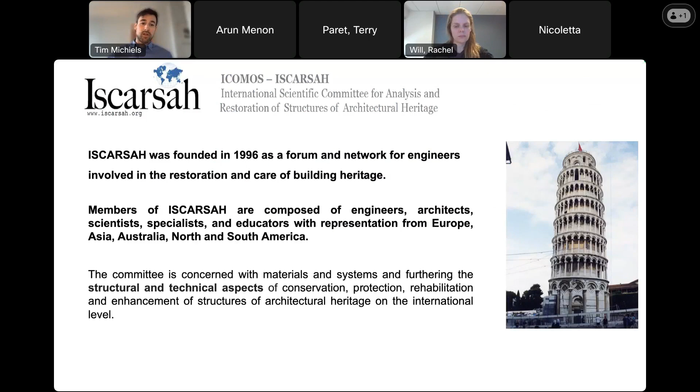ICOMOS ISCARSAH is the International Scientific Committee on the Analysis and Restoration of Structures of Architectural Heritage. It's a scientific committee of the International Council on Monuments and Sites, ICOMOS. Sometimes nicknamed within ICOMOS as the Structures Committee, we are truly an international group of engineers, architects, scientists, and educators dedicated to the restoration and care of built heritage. We do focus mostly on the structural and technical aspects of conservation of architectural heritage. We have a diverse board, with at the helm our president, Paulo Lourenço, and our secretary general is Tom Morrison, a past APT PETC chair. There's a lot of overlap here, as you can see.

The goals of ISCARSAH are, amongst others, to disseminate knowledge, promote international cooperation, and organize international training programs. Another goal is to collaborate with other scientific committees. And at ISCARSAH in 2003, we published the Principles for the Analysis, Conservation, and Structural Restoration of Architectural Heritage. This is about a 3-page long seminal document, which is available for free in 10 languages on our website. We highly recommend you check it out. If someone can post the link to it in the chat, that would be greatly appreciated. And much more in-depth guidelines for the analysis and restoration of heritage structures are also available on our website.

We publish newsletters and a bulletin. We organize several free webinars each year, all of which can be found on our website and YouTube channel. Also a small plug for our next webinar, which will deal with structures of heritage affected by war. That webinar is anticipated in late spring. We organize workshops. The last ones were in Iran, Korea, Japan, and Romania. And our next meeting will be in September at the Structural Analysis of Historical Constructions Conference in Lausanne.

The Madras terrace slab for floors and roofs is basically a thermally efficient traditional construction system prevalent in the erstwhile Madras Presidency in South India from the pre-British era, basically conceived with gravity as the primary structural loading in a region of low seismic activity.

The floor diaphragm is basically constituted of closely spaced wooden rafters spanning across walls. In turn, these rafters support burnt clay brick placed on edge and bonded with lime mortar. They are arranged in a diagonal fashion, starting from the corner, and finally topped by a layer of broken brick lime concrete and any architectural finish that is required eventually.

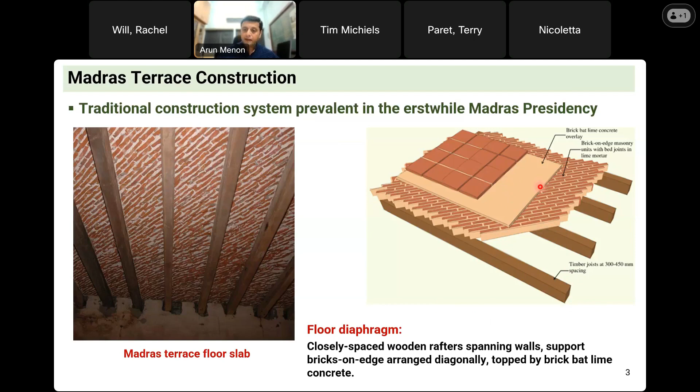A typical layout of the supporting timber joists spanning between walls and the closely spaced rafters placed orthogonally can be seen in this figure on the left. The sockets in the wall where the rafters are embedded and the diagonal brick on edge pattern of the masonry overlay are also shown.

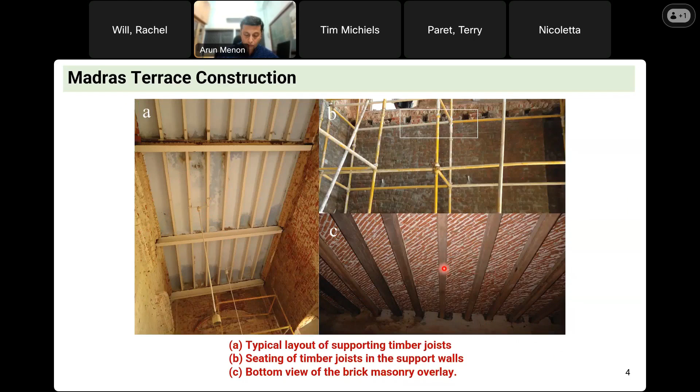A construction system that finds its roots in the pre-colonial era in the region went through a series of formal engineering iterations and finally found its way into the Bureau of Indian Standards, a code of practice, in the 1980s. This is a robust construction system where repairs or replacements of the timber rafters can actually be carried out from the soffit without disturbing either the brickwork or the lime concrete.

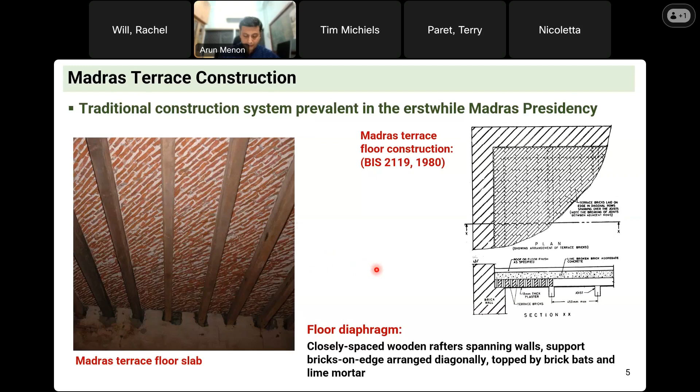Unfortunately, standard rehabilitation practice has been to completely dismantle the slab and replace it with a reinforced concrete slab, especially in recent years, citing potentially poor performance under seismic action, with the revisions of the earthquake safety standards and requirements for existing masonry buildings. In this context, with an aim to holistically achieve the preservation of this traditional construction system while addressing structural safety concerns, our study itself was designed.

The SDGs 2030, particularly SDG 9, address the need to upgrade and retrofit existing infrastructure, making them resilient to natural disasters, while also ensuring that emissions from the construction industry are minimized as much as possible. Culture serves to achieve such SDGs through an exercise of preserving traditional knowledge systems, which is an intangible cultural heritage, and finding relevance in a safer and environmentally conscious solution.

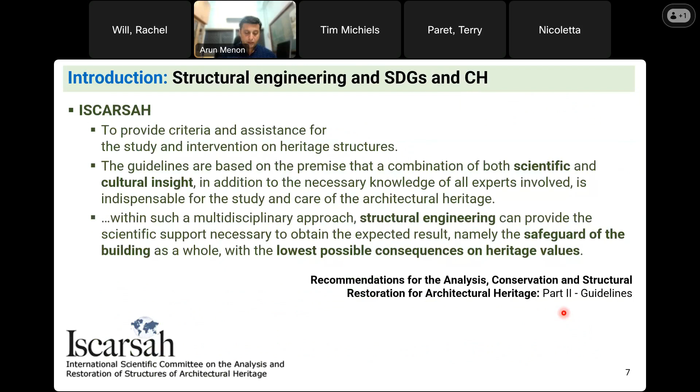As expounded by the ISCARSAH Principles, a multidisciplinary approach is required, with structural engineering becoming the enabler, providing the scientific support necessary to obtain the expected result, namely the safeguard of the building as a whole with the lowest possible consequences on heritage values. Again, guided by ISCARSAH Principles, an attempt must be made to improve and complement structural behavior of historical components of systems as against wholesale replacement with modern systems, while recognizing the limitations of modern codes and conventional approaches.

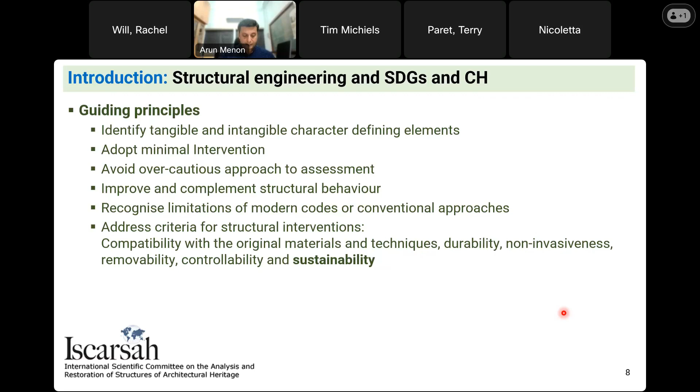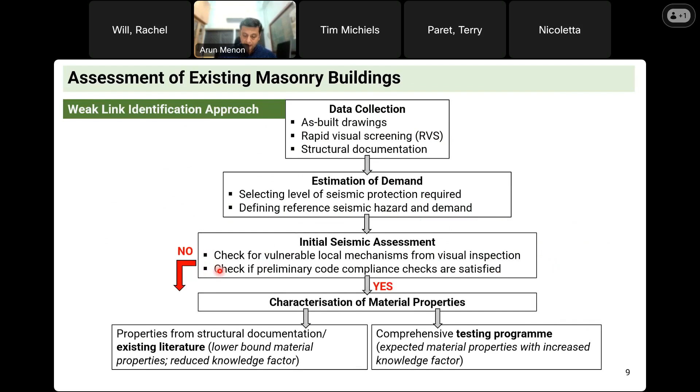All such interventions in historical buildings must essentially address compatibility with the original construction, materials and techniques, durability, non-invasiveness, removability, controllability, and sustainability. This brings us to the role of such floor diaphragms in the seismic performance and assessment of existing masonry constructions. The assessment and retrofit must attempt to identify potential weak links in the seismic load and resistance path. To ensure satisfactory box action in masonry buildings, possible local out-of-plane mechanisms must be identified and prevented through level 1 interventions that address wall-to-wall connections, wall-to-diaphragm connections, and so on.

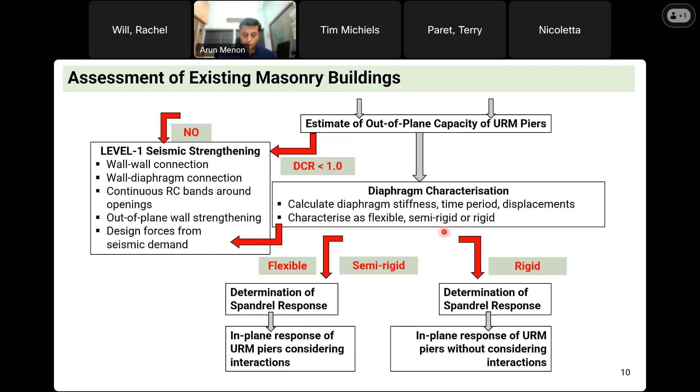The critical role of the floor and roof slabs in the seismic resisting path cannot be overstated, and its in-plane stiffness classification and response is crucial in preventing local mechanisms before any in-plane strengthening of walls is adopted as level 2 global lateral capacity improvement. This is a typical approach that's adopted for masonry constructions.

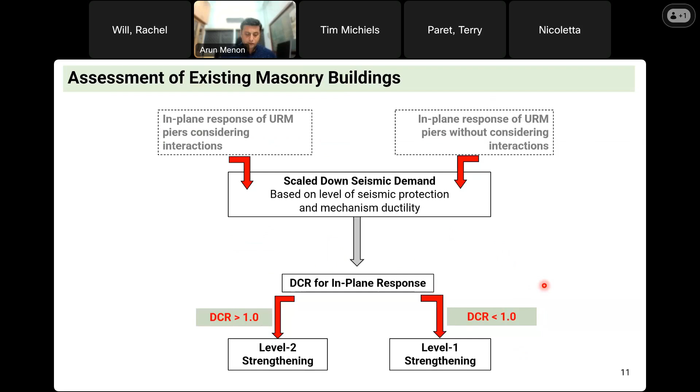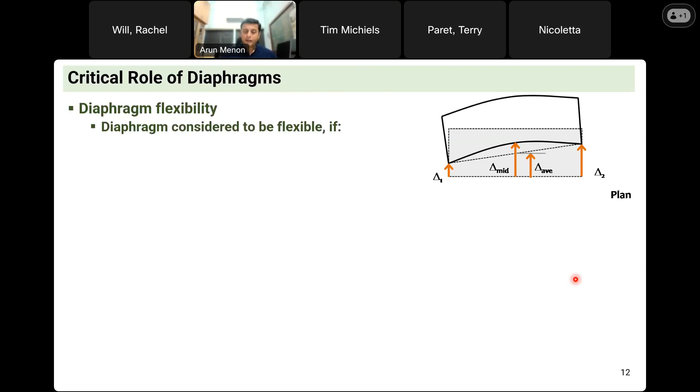Now, particularly with respect to the role of the diaphragm, while characterizing a diaphragm's in-plane behavior, it is clear that the degree of in-plane stiffness of the diaphragm will determine how lateral forces will be distributed to the load-bearing walls. If it's a rigid diaphragm, you have the distribution based on the relative stiffnesses, whereas if it is a flexible diaphragm, the distribution depends on the tributary areas.

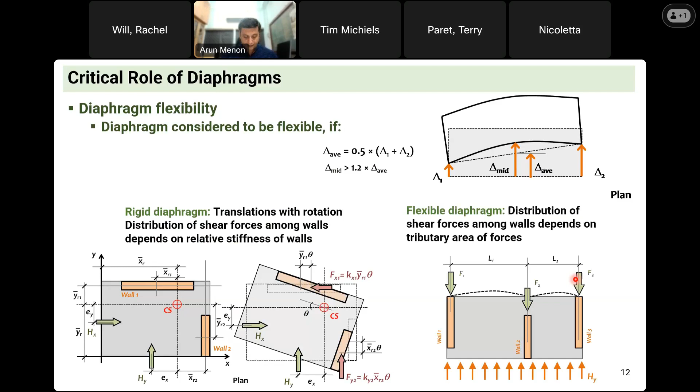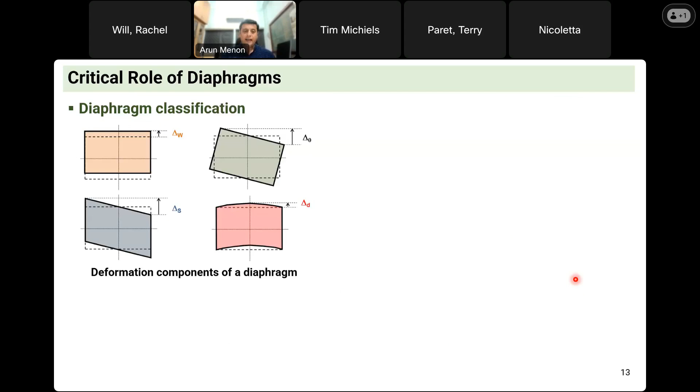The total in-plane diaphragm displacements are composed of rigid translations and rotations and flexural and shear deformations. At the two ends of the spectrum of in-plane diaphragm period of vibration versus diaphragm displacement, a rigid, well-connected diaphragm and a flexible, well-connected diaphragm would have the least vulnerability in terms of increasing diaphragm deformations being transferred to the supporting walls. But the case is quite different with stiff and semi-flexible diaphragms, with the maximum demand of diaphragm displacements coming onto the supporting walls. So it's in this context that the study has been undertaken.

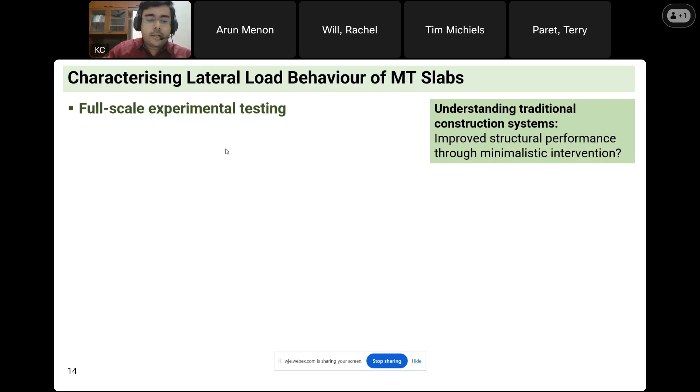It is well accepted that the lateral response of Madras Terrace slab has limitations. However, this needs to be quantified adequately, for which the lateral response of Madras Terrace slab was studied using a full-scale experimental test in the original configuration. The test specimen was prepared at the Structural Engineering Laboratory of IIT Madras. The following images show the steps involved in the same, starting from placement of the timber joists, followed by the laying of the brick masonry overlay, and finally, the placement of the lime concrete overlay.

Further, a loading tree setup was created so as to distribute the actuator loads to each timber joist, thereby closely simulating the deformed profile of the slab under inertial loads. Displacement control loading was applied through the actuator, and LVDTs were placed at relevant points, both in the overlay as well as the timber joist, to monitor the displacements.

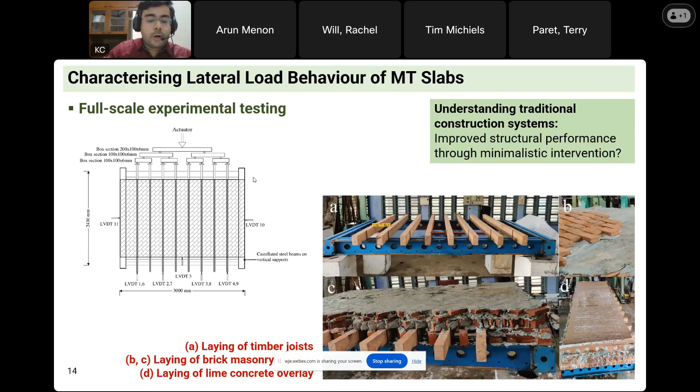After the loads were applied, the deformed profile of the diaphragm showed significant sliding in the timber joist due to a lack of integral action between the joist and the overlay. Sliding of the joist commenced at a load of approximately 17 kN, and therefore it was inferred that a lack of integral action between the timber joist and the overlay is the principal weakness associated with the system under lateral loads.

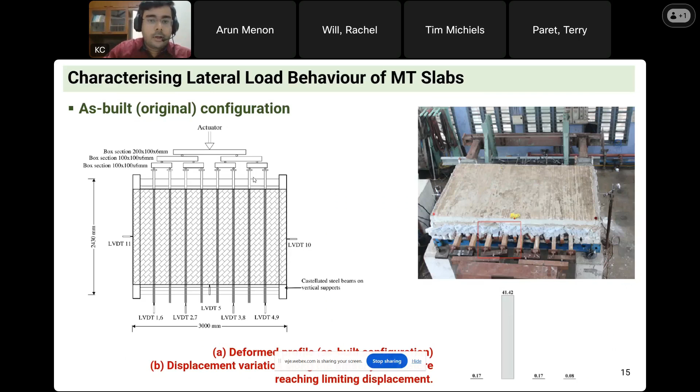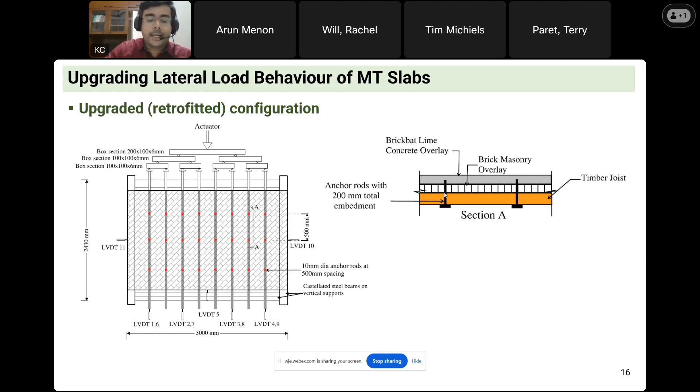As the next step, a retrofit intervention was introduced to improve the system in terms of bringing in integral action between the joist and the overlay. The intervention was minimalist in nature, without affecting the appearance and the positive attributes of the original system, but upgrading it for improved seismic performance. The upgrade involved post-installed anchor rods drilled from the underside of the joist, acting as a shear connector that integrates the joist and the overlay. The same loading protocol, which was used for the test in the original configuration, was used here as well.

Results showed that there was no sliding at all in the timber joist, as shown in the image here, and a uniform deformation response of the slab was achieved in the image below. Further, as shown in the image, it was observed that the failure was no more defined by the sliding of the joist, and it was defined by the flexural cracking of the overlay.

Comparison of the force deformation responses in the as-built and the upgraded configurations showed that there has been a significant strength capacity enhancement, close to 4 times for the upgraded configuration. This was a major improvement in the capacity of the system, as it changes the hierarchy of weak links in the system by extracting the full capacity of the slab, making it less vulnerable and delaying its failure compared to other members of the lateral load resisting system.

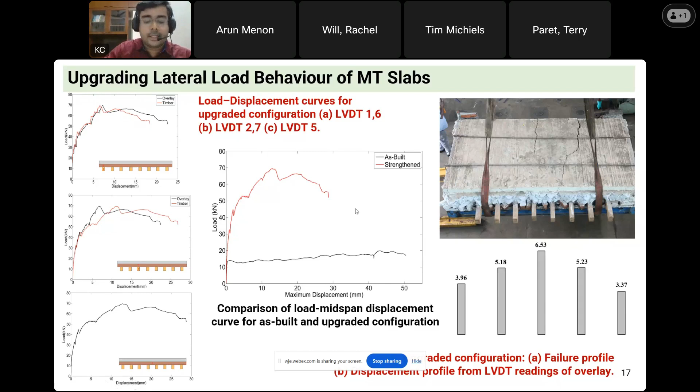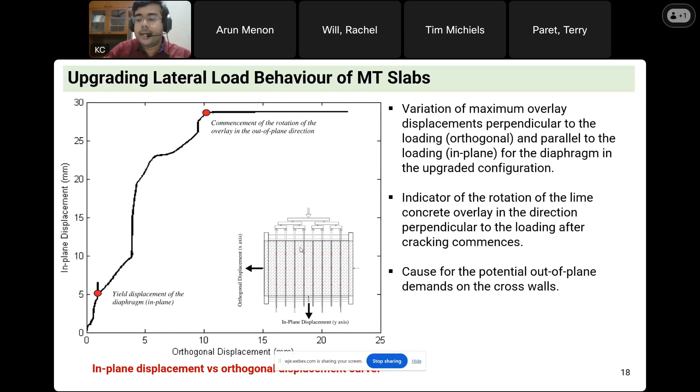While upgrading such traditional systems, it's also important to check if the upgrade brings new effects to the overall system response, and we need to address the same. One such effect that was observed was the rotation of the overlay as a macro block post-cracking. This results in displacements perpendicular to the loading direction and also could cause out-of-plane demands on the cross walls supporting the slab. This aspect needs to be addressed in the out-of-plane assessment of these cross walls, considering combined in-plane and out-of-plane effects for the same, which was undertaken as part of another study. This is very important since this upgrade of one weak link, that is the diaphragm, should not result in effects that create new weak links, even though these may be less critical in terms of their weaknesses.

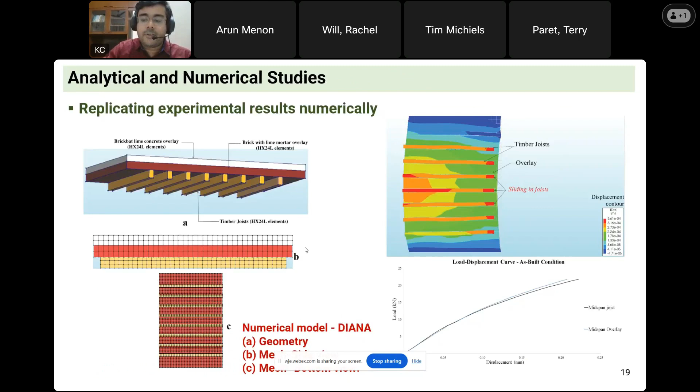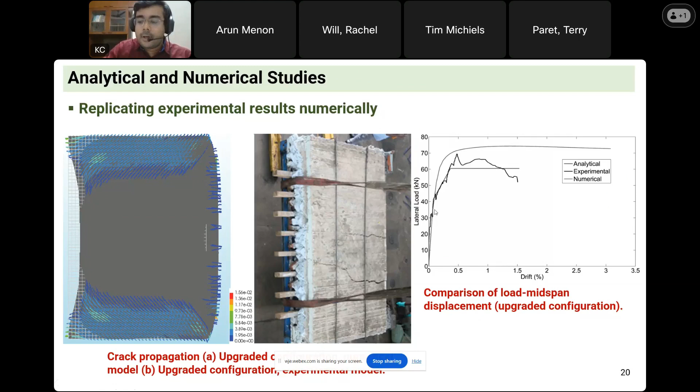Our experimental results were further verified and validated with numerical studies that successfully replicated the failure profiles and capacity curves from experimental tests. Based on the same, a simplified analytical model was defined for the upgraded Madras Terrace slab, which is useful for practicing engineers as well. The model is defined by a stage 1, which utilizes the integral action of the overlay and the joists for defining the elastic stiffness and the cracking load of the system. Stage 2 is defined by the post-cracking response of the overlay, and stage 3 is defined by the attainment of peak drift of the system.

Now, the conceptual understanding of the response of the Madras Terrace slab was not limited only to the upgrade of existing slabs. As the next step, the understanding was extended to introduce a re-engineered form of the traditional slabs that fits into the modern design fundamentals. This included setting up of design guidelines for the gravity design of the slab, considering partial to full composite action between the overlay and the joists through shear connectors.

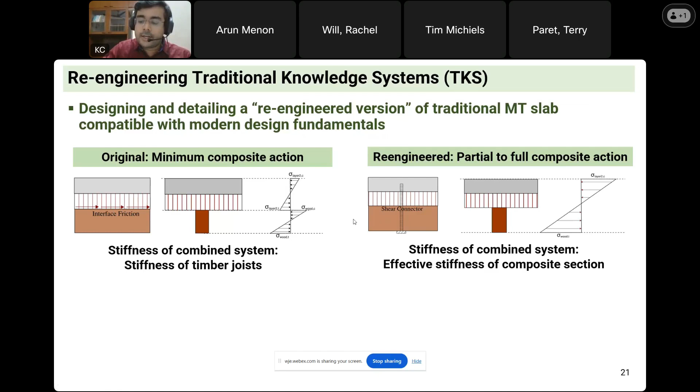It is useful to point out here that the traditional system was relying only on the interface friction for shear transfer. The design process involves arriving at the optimum size and spacing of shear connectors to ensure integral action between the overlay and the joists, both from gravity as well as lateral load considerations. The design also considers effective stiffness of the composite action for long-term deflection considerations, which now resolves the long-term deflection issues and the sagging of the timber joists due to non-composite action.

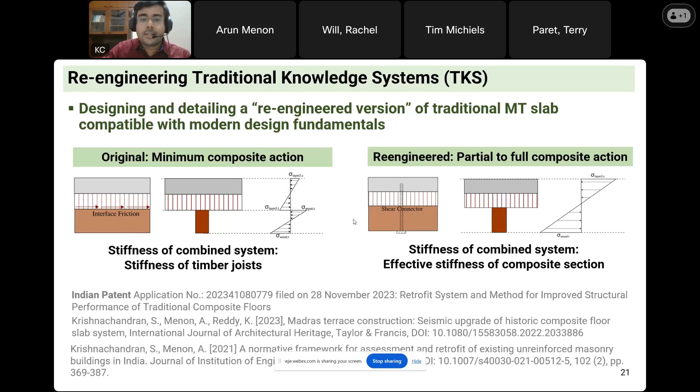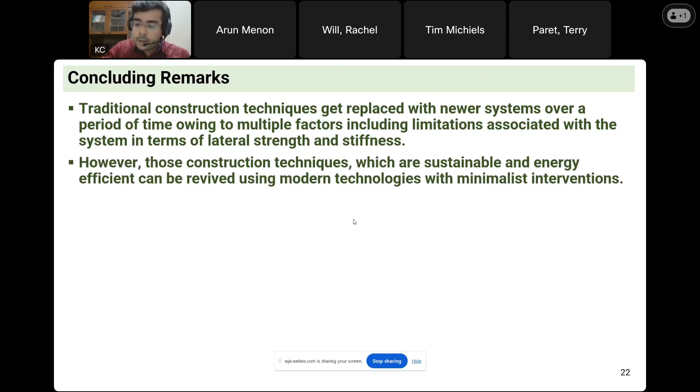In addition, the presence of tensile elements in the form of timber joists can be utilized as collector elements for the drag force transfer and also as chords in the slab. Summarizing, many of the time-tested structural systems with significant positive attributes get replaced with newer structural systems over time. When the bounds of our knowledge and the technical advancements in the subject domain get broadened, it is expected that the inefficiencies and weaknesses associated with these traditional systems get identified. However, in the process of trying to resolve these weaknesses, we tend to overlook their positive attributes and replace the structural system with newer ones.

However, there could be an option to improve the structural system, re-engineer it, or in other words, improve the structural system. In this study, we attempted to upgrade the Madras Terrace slab for the identified deficiencies using modern technologies with minimalist interventions, bringing in composite action to the system and retaining the original materials and appearance. Experimental testing was carried out in the existing configuration and the upgraded configuration, and results indicate significant improvement in the ultimate load capacity and the post-yield response due to the upgrade. Finally, the understanding was also extended to introduce a re-engineered form of the slab that fits into the modern design fundamentals.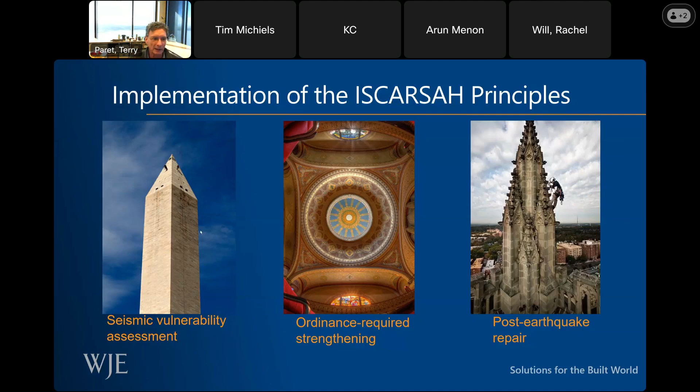I'd like to start with a few random thoughts about the ISCARSAH Principles themselves. Many of you are going to be familiar with the ISCARSAH Principles. Some of you perhaps not so much, but the principles are fundamentally high-level guidance. They are philosophical, not procedural. In my view, that's probably a plus, right? Because one of the problems we have in our discipline is the use of methodologies on highly nuanced heritage structures, right? Formalized methodologies don't blend well with highly nuanced heritage structures.

On the other hand, the lack of procedural guidance has its downsides in that it leaves some folks in the profession very unmoored and unsure of what to do, and sometimes reaching for the wrong procedures that are incompatible with heritage structures. In general, the principles are obviously very conservation minded, and with respect to seismic aspects, they're unlike any document in the United States, perhaps with the closest being Preservation Brief 41.

For those folks who practice in the US who are interested, Preservation Brief 41, while perhaps not perfect, is a really good start to bringing conservation mindedness into the seismic world. My view is that the principles ought to be self-evident to the segment of the engineering community that practices in the conservation seismic field, but it's clear that they're not, and you only have to look at the widespread use of ASCE 41 in the US, which really has not one whit of conservation mindedness in it.

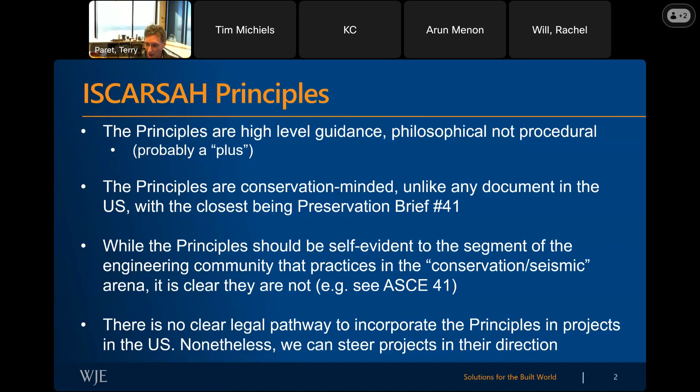Incorporating them explicitly. So the first project I'm going to talk about was really initiated by the Mineral earthquake in 2011, which some of you at least know caused damage to a number of monumental structures in Washington, D.C. The day after the earthquake, we were brought in to perform a damage assessment on what we believe to be the tallest unreinforced masonry structure in the world, otherwise known as the Washington Monument, which it turns out was damaged enough that it had to be closed for assessment and repair for 2.5 years following that earthquake.

So while there wasn't a lot of damage to kind of more normal community-wide buildings, there was substantial damage to monumental type structures. That work ultimately led to us being asked to perform a seismic vulnerability assessment of the structure, and that's really what I'm going to be highlighting here, what I'm going to be talking about.

A few of the principles highlighted by this are: do your research, respect heritage value, and credit inherent strengths. Don't be reflexive, think through the problem, because heritage structures are nuanced. And finally, respect the project criteria. I think that's a particularly key one here that I want to expand on.

Essentially, we were asked, and this is important to understand what I'm going to be telling you, we were asked to determine if this historic, tallest unreinforced masonry building in the world really provided a level of seismic safety that was roughly equivalent to that of a new structure. Keep your eye on that ball, because that was the project goal, or that was our charge, and we didn't expand that charge. We kept to that charge, and keeping to one's charge on these projects is super important.

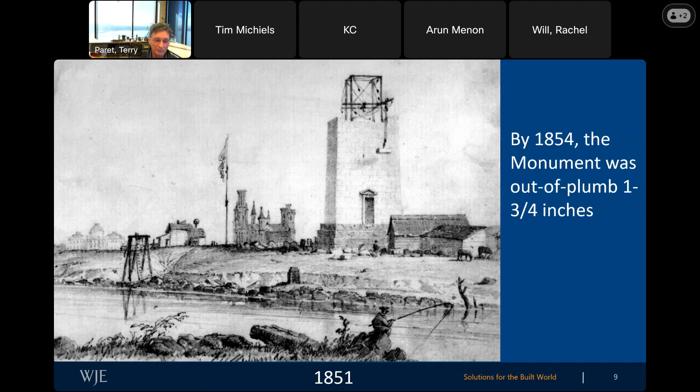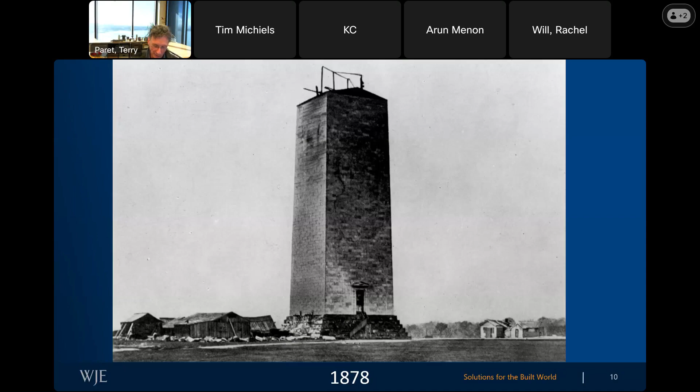Construction of the monument recommenced in around 1878, more than a decade after the Civil War had ended, at which time the project was taken over by the U.S. Army Corps of Engineers, and a very brilliant engineer by the name of Lieutenant Colonel Thomas Casey. The first thing Lieutenant Colonel Thomas Casey did was to recognize that the foundation was very, very inadequate for a structure that was ultimately to rise to 555 feet tall. So he redesigned the structure and he redesigned the foundation.

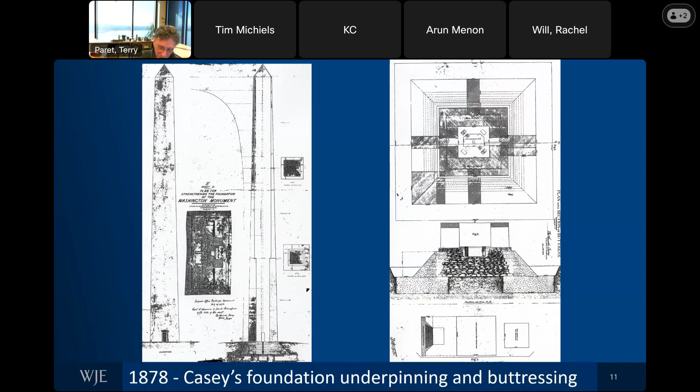We know an awful lot about the monument's construction, which I'm not going to take a lot of time to describe, other than to say that the top of the monument, the pyramidion, its structure is very different from the construction of the balance of the monument, the shaft. It's all unreinforced masonry, but the top is a very oddball structure.

Most of the structurally significant damage from the Mineral earthquake was concentrated in the pyramidion up at the top. So keep your eye on that ball as well.

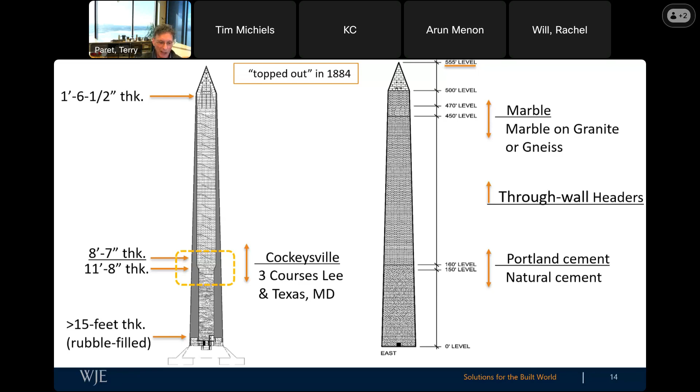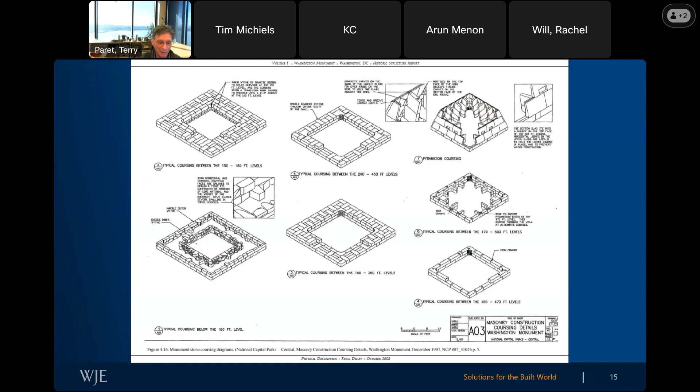I found the coursing diagrams for the monument, which we found in the HSR, to be fascinating and very informative about how the monument was constructed and how the materials were laid out within it. On the basis of everything we knew, we prepared very detailed models in SketchUp so we could really understand the geometry of the system and identify the various parts.

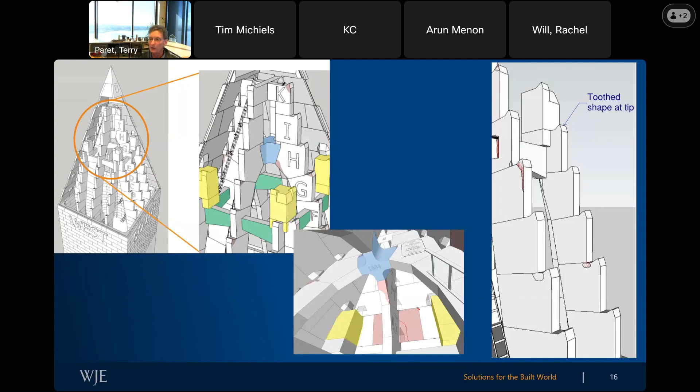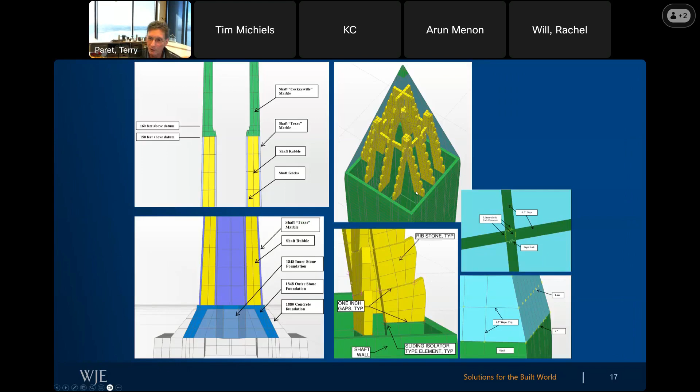On the basis of all of that as well, we developed nonlinear analysis models in SAP 2000, which I don't need to go into detail about, to give you the crux of what this project was really about.

Simultaneous with all that work, we were working closely with our partners in the geotechnical realm to study the seismological aspects of the earthquake and of the site. Don't take your eye off that ball, the seismological aspects.

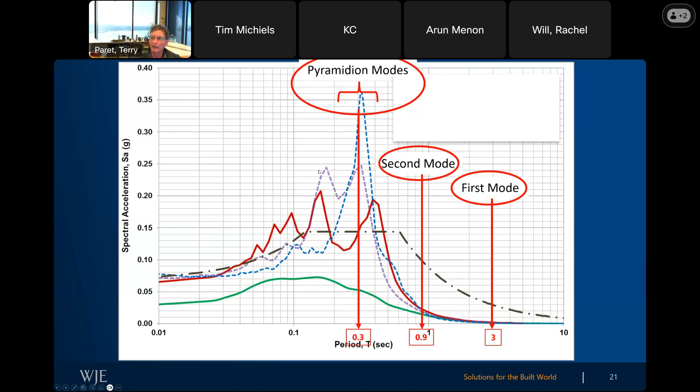Hold that thought. If you look at the legend, there's still more on this slide than you need to focus on. First, the dashed black line is the maximum considered, risk-adjusted maximum considered earthquake for the USGS. This is the 2475-year return period earthquake - the basic earthquake we designed based on, and in the US we design based on two-thirds of that number. So that's the MCE, the risk-adjusted MCE.

The next thing you should look at is either the dashed blue line or the dashed purple line - these are representations of the site response of the Washington Monument, which sits on the National Mall. Those two lines were calculated in different ways.

The key point to see here is that those lines substantially exceeded the MCE in the short period range and were substantially less than the MCE in the first mode. The reason the MCE is so much larger than the other lines in the first mode is really a consequence of what's believed to be the motions at the site from that 1886 Charleston earthquake.

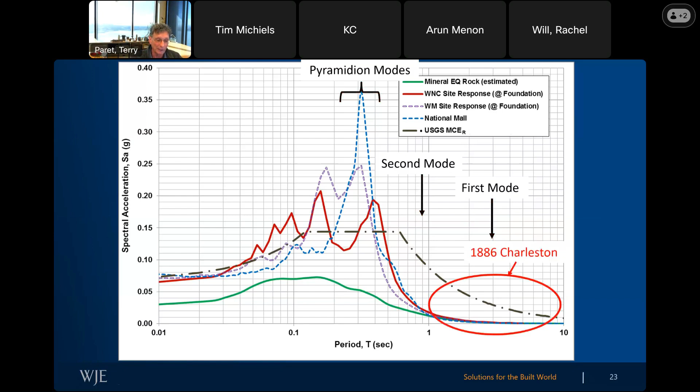Here's the last slide I'm going to give you before the conclusions. We are that close, I just haven't told you the punchline yet. This is another representation of the motions in ADRS format, in which the thick turquoise-like color line is the best estimate of the site response spectrum from the 2011 Mineral earthquake, and the thick dark blue line is the best estimate of the response spectrum for the MCE motions, which include the 1886 Charleston earthquake.

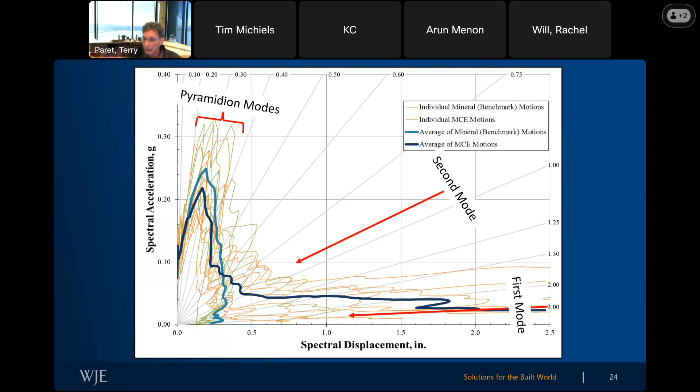I think this slide tells the story most clearly. During Mineral, the pyramidion modes were excited to a greater extent than they would have been even by the MCE. But the shaft was barely excited at all relative to the MCE. However, the shaft mode is right there at the peak of the Charleston response spectrum.

So the conclusions are these: the seismic vulnerability criteria for the monument were really satisfied. This structure can be argued to be as safe as a new structure. Why? Because the pyramidion experienced its MCE in 2011, and the shaft experienced its MCE in 1886. Done, right? You can kind of wash your hands of it.

I will tell you in closing on this particular aspect that we did recommend that certain additions be made to the pyramidion just solely to account for potential directionality differences between some future MCE and the MCE we just experienced. So that's it for that subject.

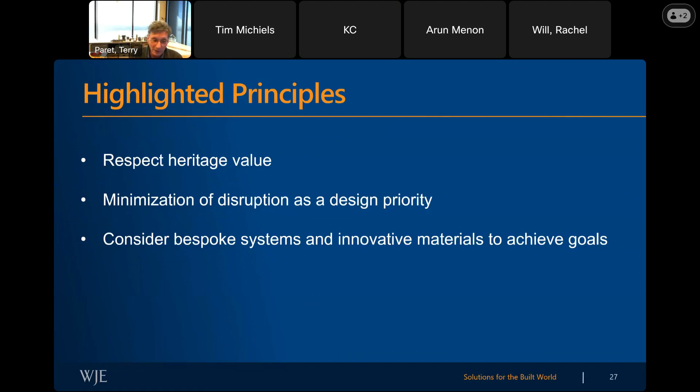This is the ordinance-required strengthening of Sherith Israel, which is a synagogue in San Francisco. The highlighted principles for this particular project are: respect heritage value, minimize disruption as a design priority, and consider bespoke systems and innovative materials to achieve your goals.

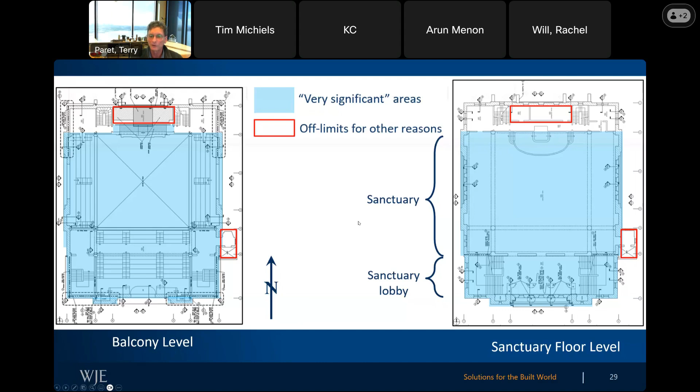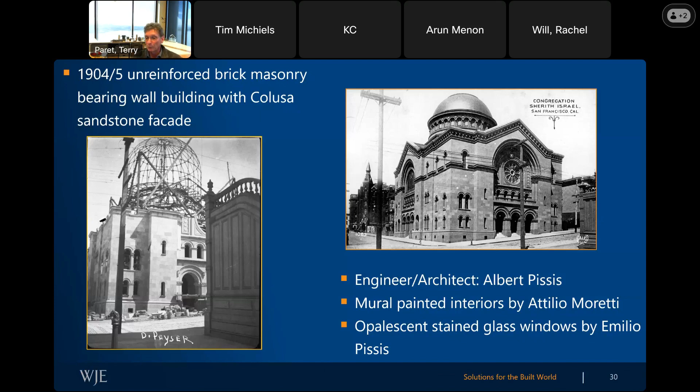But first, I want to give you a little bit of context about the structure so you understand how we got to where we are. First of all, this is a roughly 1904 unreinforced brick masonry bearing wall building with some steel framing—some very light, flimsy steel framing in the interior space with a Colusa sandstone facade. The engineer and architect was the very brilliant Albert Pissis, who designed a number of major buildings in San Francisco that survived the great earthquake in 1906. The guy just had a proven trial-by-fire record. Unbelievable. And all without a computer.

So you understand a little bit more about the structure, I want you to see this.

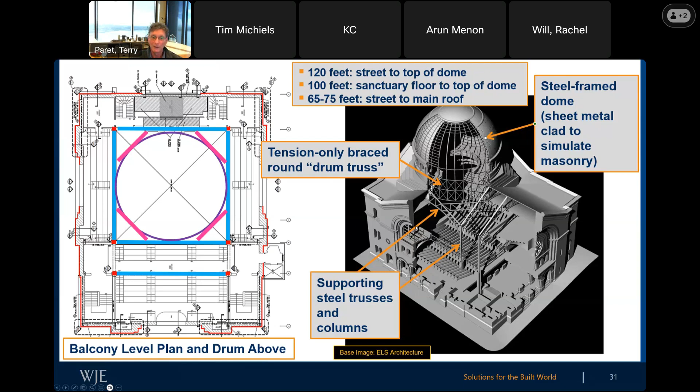Notably, it also has very flexible wood diaphragms, and they're flexible not just because they're wood, but because of the sanctuary space at the balcony level and through the dome, there are these very large openings in the diaphragm. So we have very flexible floor systems supporting the walls out of plane, which drives a fair amount of the response.

These walls functionally, with flexible diaphragms to support them out of plane, bow outward. During seismic events, they bow significantly, and because they are articulated in plan, they try and unfold, right? They try and catenary to a degree. We demonstrated that is actually true, that the damage we see in the attic space today from the unfolding of this wall and the out-of-plane bowing behavior of all four walls is real. It's predictable analytically.

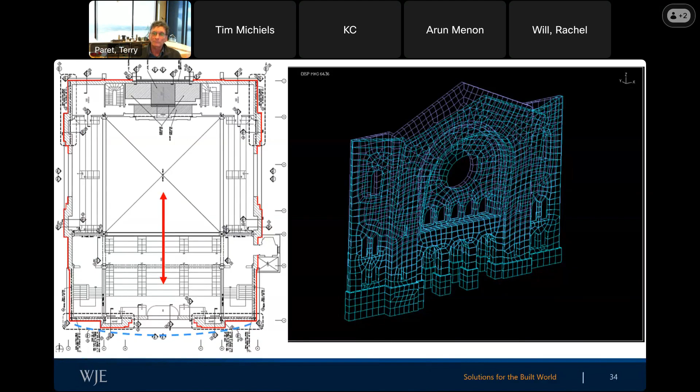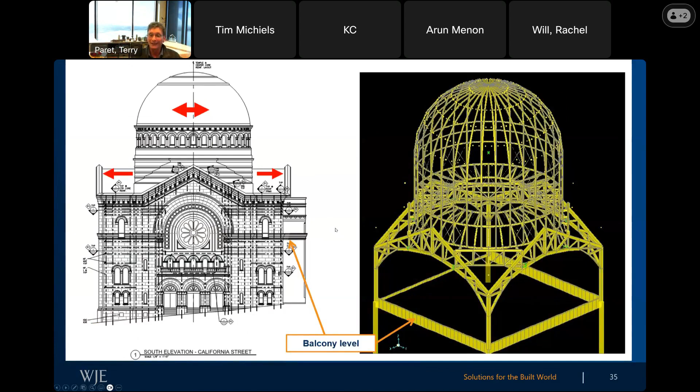And we think a lot of this behavior is also driven, interestingly, by the excitation of the drum and dome. When it tries to sway back and forth, it pounds on the gable roof sections, and those pound against the gable end walls and help to push those things out of plane, which is not a great behavior mode. Lots of other behavior modes in this thing that I could talk about, but because I'm only talking about one intervention, I'm only talking about that behavior mode.

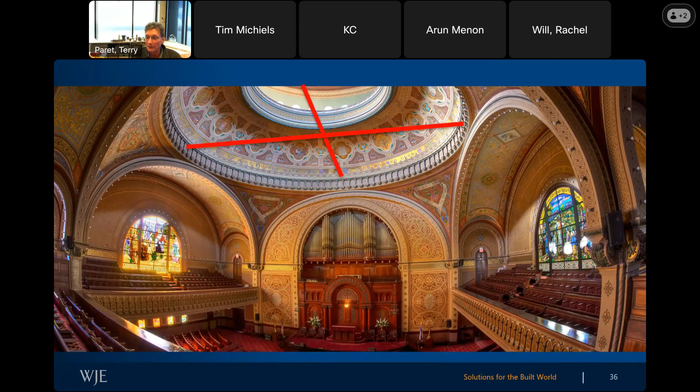Now, it's pretty intuitively obvious that one way to help control that behavior mode is to put in tension ties. But we took one look at the thing and said, well, that would be pretty ugly, pretty disruptive. So we tried to really improve on this traditional system, the way it's been used around the world. We wanted to avoid disruption to the sanctuary, and we wanted to neutralize some of the disadvantages of using steel or iron, because those things undergo plastic deformation.

You have a choice, right? You can either make them very strong and stiff, in which case the odds are they're going to pull out of the walls where they're connected. Those connections will fail. Or you can make them less stiff and less strong and let them yield. But then after a single cycle of response, your walls are out of plane, and there's no ability to bring them back into their original position.

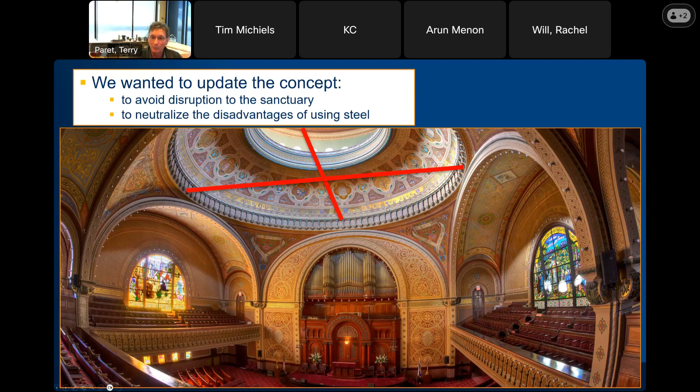So we got creative, and we put in a tension tie system that was above the ceiling of the sanctuary and circumvented that open area, the interior drum. That system consisted of an octagonal tension ring with some outriggers composed of steel and nitinol harps, which I'll describe in one moment, but 4 nitinol harps, one in each quadrant of the structure, one to support each of the exterior masonry walls.

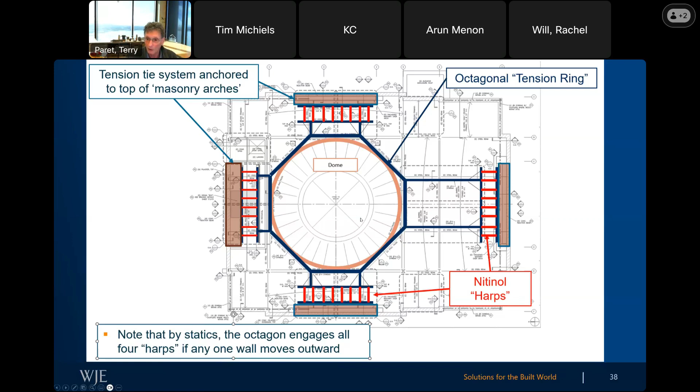And note that by statics, when you look at this, if one wall tries to move outward and fall out of plane into the street, the nitinol actually gets engaged. All 4 of these harps get engaged with the movement of only one wall. So structurally, it's really very efficient.

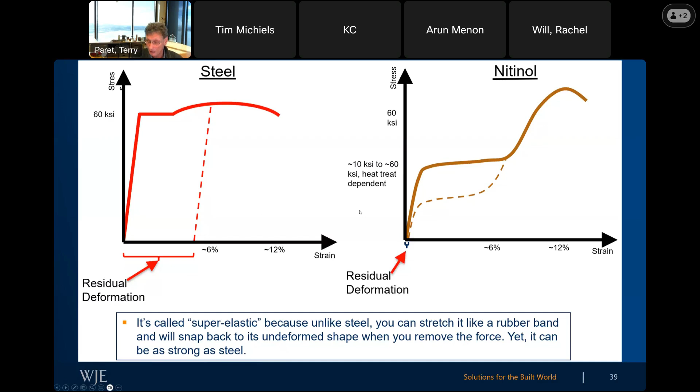Nitinol, for those of you who don't know, is a super elastic material. It's magic metal. This stuff is the coolest stuff you could ever work with. If you stretch steel out to 6%, you have mostly non-recoverable residual deformation. But if you stretch nitinol out to 6% and let go, it'll bounce right back to the way it started. So this material, relative to the masonry and to this building, has wonderful capability to do a lot of things, which I'll describe in one second.

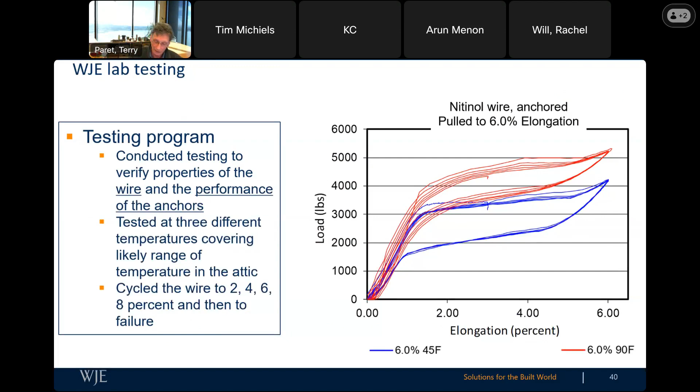While the properties of nitinol are fairly well established, we went through a fairly elaborate testing program in-house to validate that this would work for us. And these are the load displacement curves really for the nitinol in our lab. And you can see we're stretching it out to 6%. And when we let it go, it goes back to 0. I mean, it's magical stuff.

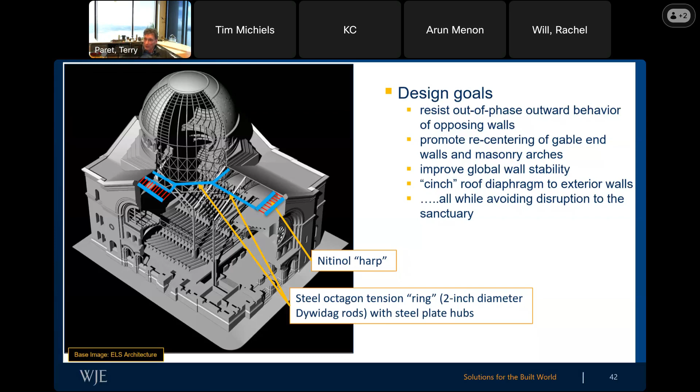What this ultimately does, it not only resists the out-of-phase outward behavior of opposing walls, but it promotes recentering, right? Which is kind of like a goal of seismic response that we'd like to install in many structures to get them to recenter. But it improves the global wall stability, and essentially it helps to cinch up the whole roof diaphragm, where we have this giant opening in the middle, all while avoiding disruption to the sanctuary.

Now, I've got 5 minutes left, right, guys? So maybe I'll hit this for a couple of minutes. Yeah, you got time, Terry. All right. So I exceeded my own best expectations.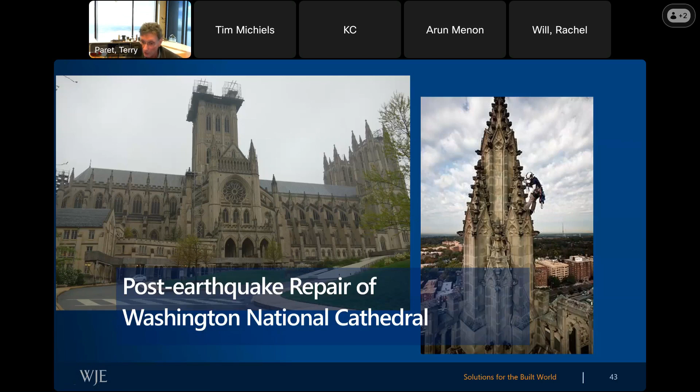So the post-earthquake repair project is of the Washington National Cathedral. This too was damaged by the same event that the Washington Monument was damaged by. It's worth noting that this building has an extraordinary number of pinnacles on it. This is all unreinforced masonry as well. Extraordinary number of pinnacles everywhere you look, which I'll talk about in a few seconds.

The highlighted principles for this, again, are respect heritage value. Again, respect the project criteria, which here were, we don't want to do a seismic upgrade of the building. We want you to fix the damage and not do much more than that, and also minimize interventions.

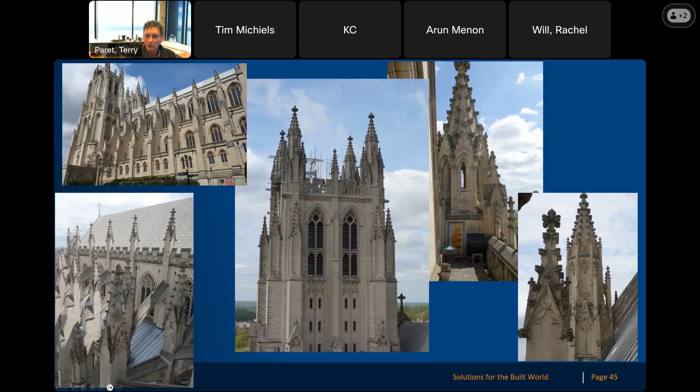So I mentioned before, this building has a lot of pinnacles. It has a lot of turrets and other features. In some cases, it has so many pinnacles, the pinnacles even have pinnacles. They're all over the place. Many of them were damaged. I'm not going to show you a broad swath of that, but some of them, the upper courses fell to the street or fell and hit the roof. Some were just dislodged. Some just rocked back and forth, but all over this structure, pinnacles and towers and turrets were damaged.

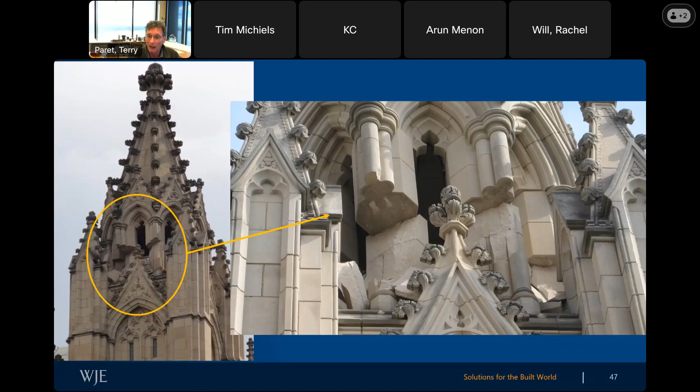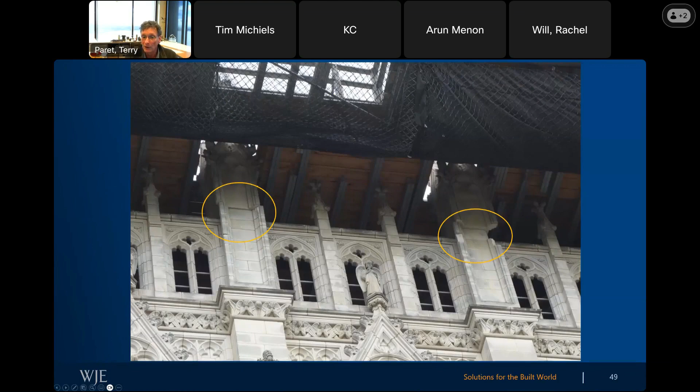And some very significantly, you can see here, this thing was really kind of teetering, in very bad shape. And this is a huge item, weighs many metric tons, at the very top of the Washington National Cathedral, about 300 feet in the air. Again, very significant damage with very heavy masonry elements, just ready to fall 300 feet down. To me, just mind-blowing stuff. Luckily, the earthquake stopped before it actually fell.

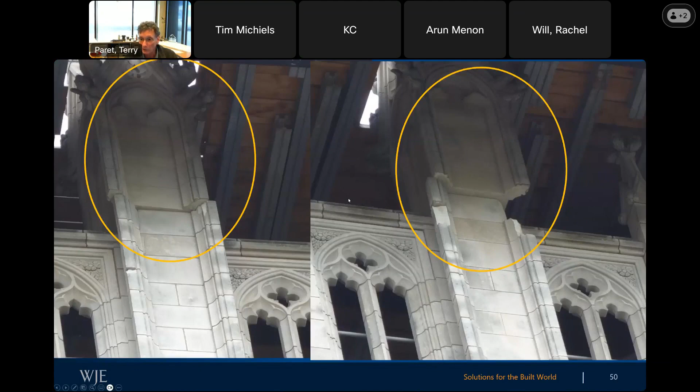So let me just tell you our approach, which I think I can tell fairly briefly. If you think about this as a problem, you ought to recognize that when material was shed from the tops of some of these pinnacles, that acted as a fuse that actually relieved the vulnerability of the joints below. Where the material fell, it was a significant hazard, but it actually relieved some of the problem.

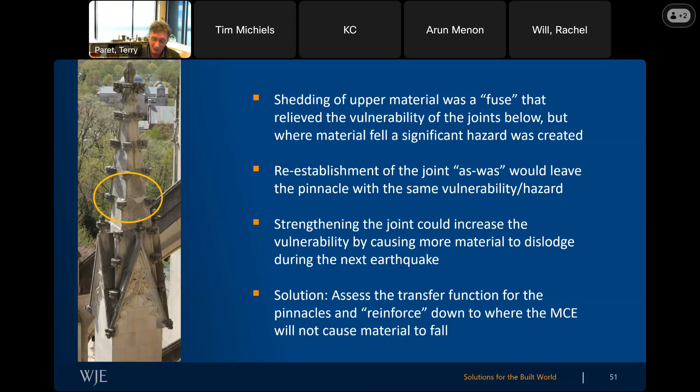The problem for us from a repair perspective was that reestablishment of the joint as it was before would leave the pinnacle with the same vulnerability and hazard, which really was right on the edge of being disastrous in many cases. But strengthening the joint could also increase the vulnerability by causing yet more material to dislodge during the next earthquake. So the solution here was to assess the transfer function for the pinnacles, which was actually fairly simple, and I'll explain why. We did this all without developing a fancy structural model, and reinforced these pinnacles and towers and turrets down to where the MCE would not cause material to fall.

Essentially, when you think about these pinnacles, there's a bunch of coursing here, and each course has a certain weight, right? So we can easily calculate by hand the weight of the system, if you will, at each bed joint. We can also calculate the resisting moment to overturning from the dead load of the masonry. So we know the weight, we know the resisting moment.

We now know, for any bed joint in these structures that was damaged by the earthquake, the transfer function, right? We know because we know what the site motion was. We just didn't know what it was up at the tops of these pinnacles. But knowing where the damage was and what the resisting moment was, we now have a pretty good estimate of the transfer function for that level.

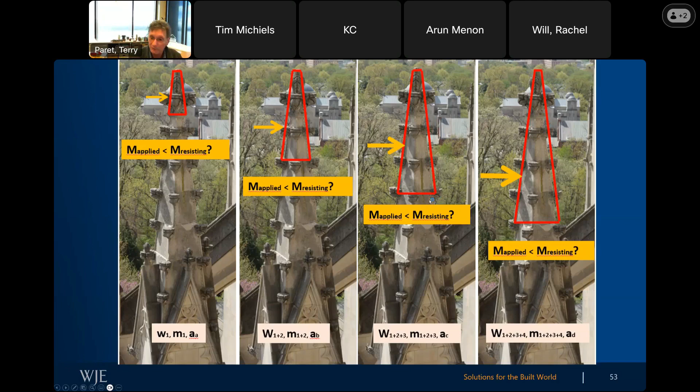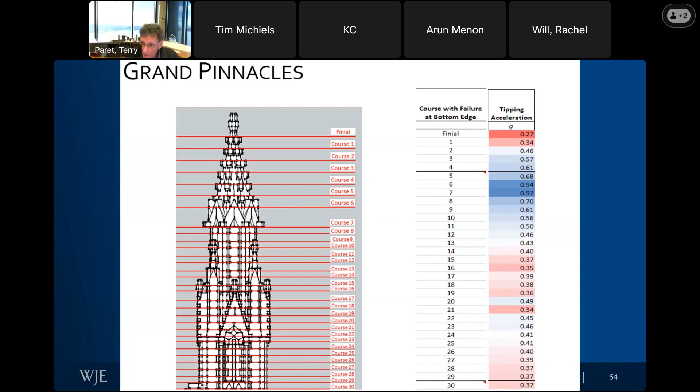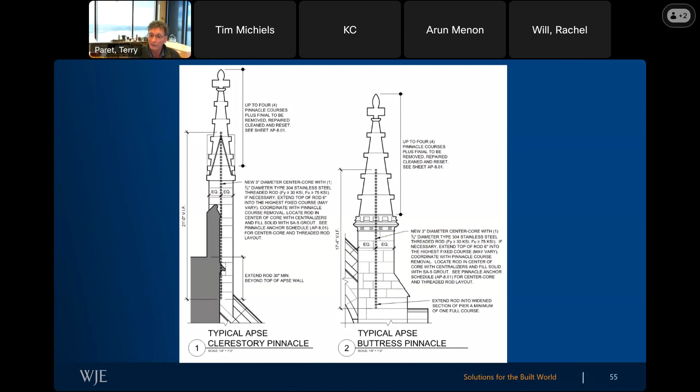So essentially, all we did was develop Excel spreadsheets, try and understand what the tipping acceleration would be at any bed joint elevation, and develop strengthening techniques which consisted largely of center cores, and install them down to the level where we believe we would not be increasing the hazard, but just to that level, right? So that we kept the hazard where it was, we could resist the MCE motions, and the pinnacle below that we believed was stable by virtue of its own dead weight. Hopefully that makes sense. I think that's the end of my presentation.

Thank you so much, Terry, and right on time. And you got all your 3 projects in. That's very impressive. And the projects were probably even more. Arun and KC, please also join the panel. We will have a series of questions from the audience and a couple of comments.

And at first, I'd like to say that I really loved some of the through lines in all of these presentations. And that is that both of you started with a thorough analysis, right? That full understanding of structural and material characteristics of the structures you worked on. And that is really the first thing that these ISCARSAH principles demand. And then the detailed analysis before going into an intervention, trying to find the minimal intervention in your projects and balancing these old and new materials.

And those tenets are, I believe, Terry, you said it well, that a lot of what we do, we don't explicitly use these ISCARSAH principles, but we have them in the back of our minds and we use them whenever we can use our engineering judgment. So I don't know if you want to make any other comments on that or if we should go into the questions of the audience.